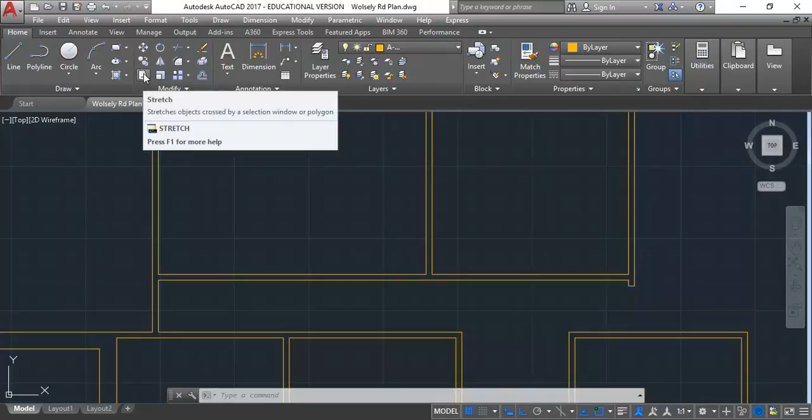To use stretch, if you haven't used this tool before, there's really just one trick to it. Once you click on the stretch tool, you need to remember that a crossing is right to left. With tools like this, if you haven't used them before, look at the beginning by clicking on the little arrow next to your command line.

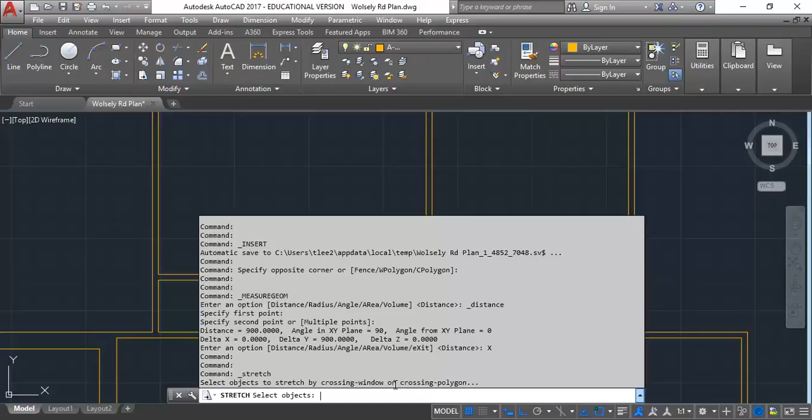It'll bring up all the text that's come up previously, and there you can see it says: after stretch, select objects to stretch by crossing window or crossing polygon. So the key term there is crossing, and if you remember, you get a crossing window by clicking right to left.

A crossing is green, and you can see there by going from the right-hand side and now moving to the left, I get a green window with a dashed outline. Going left to right, I get a blue window with a solid outline. If that's something you haven't noticed, spend some time making some windows to select things.

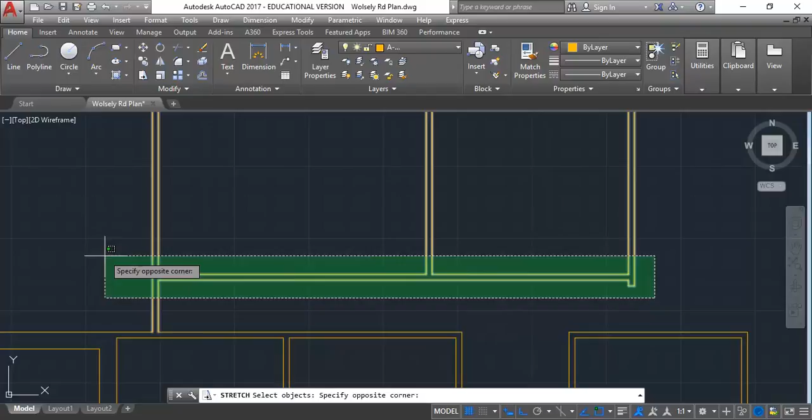By doing a crossing window right to left, it'll cross over all of those wall endpoints that I want to stretch. I'll click and you'll see it's going to highlight those walls, but it's only going to affect the endpoints that were inside my window, inside the green window - so all of the corners here, but not the corners up here.

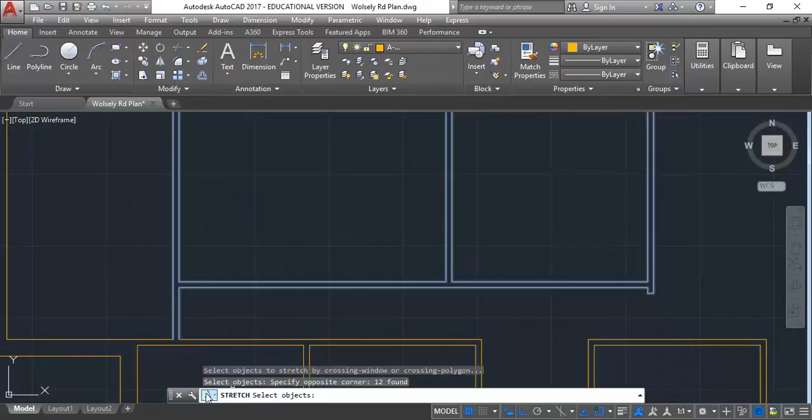Now you can see on the command line it's still asking me to select objects. So what do I need to do? Exactly, enter to move on to the next step, which will then ask me to specify a base point. This can be anywhere - it's just a point to start measuring from. So I'm going to click a point in empty space here, just so it's clear.

Now I want to go straight up from that point. So I'm looking at that point and I'm going to 90 degrees before I type in the measurement.

So when you do this, and you've got like furniture, you've got all things already in there, that will all shrink and stretch. You can stretch those together as well - give it a measurement of how much you want. That's right, so that's what I'm doing now.

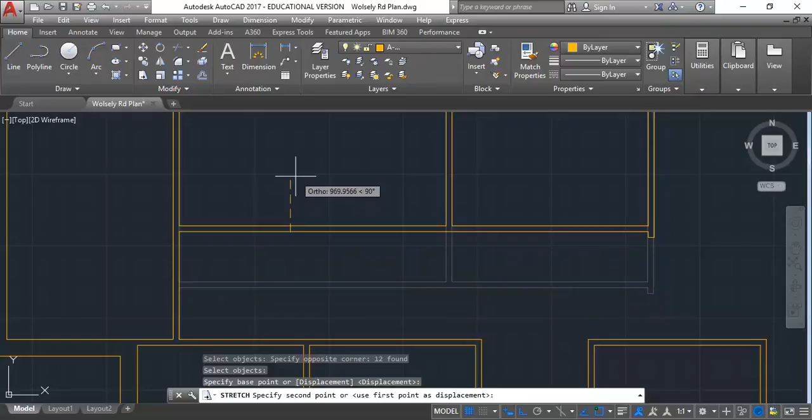So I've clicked the base point, and now by moving in the direction I want, with ortho turned on, it's stretching vertically, so I can type in the measurement, which is 100. If I press enter, it'll take them up in that direction, and I'll check the measurement using measure and make sure that now it's a metre.

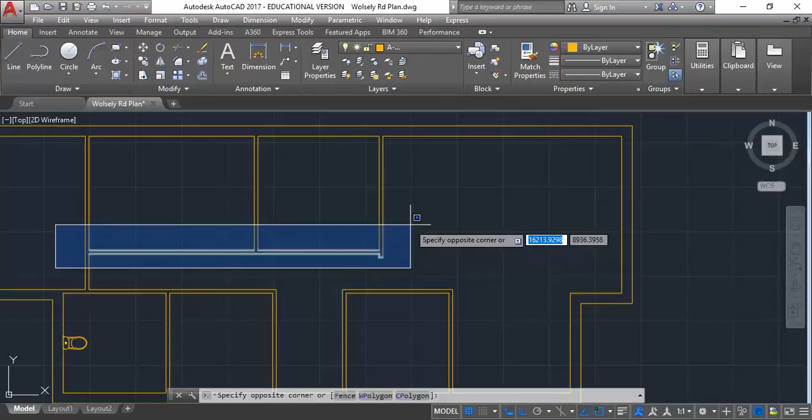So anything that was in that square above - even though it wasn't highlighted with the green square - that furniture, everything will be shrunk too, as long as you go right to left, right to left of the green, so not left to right. If I'd gone this way, you can see it's only selecting the things that are inside, not the ones that are just crossing.

So now that I've done my... yeah, oh no, look, you should just watch because I'm just going to do a little bit more and then I'll give some time to work on it.

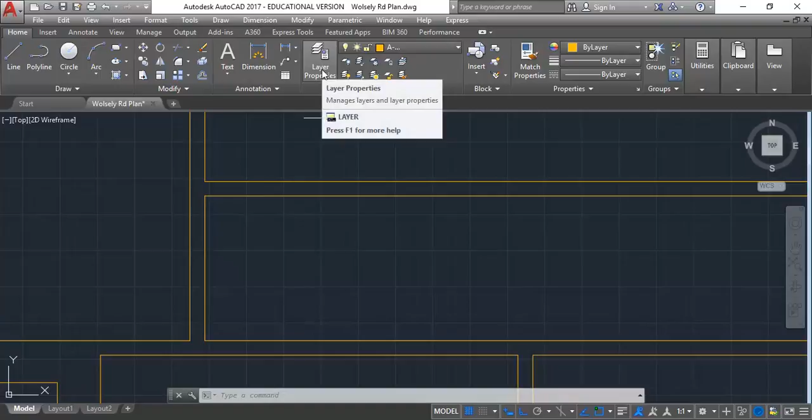So then I want to make the opening. This is the process you should follow normally as well - when you are making a door or any other opening like a window, you should always do the opening first before you try to draw in the detail.

You can see in the layers, I'm on the wall layer, that's all I need. I'm going to draw a line from the midpoint on the right-hand side of that wall, which should be in the centre of the corridor. Then I'm going to go to the left, and with perpendicular on, I'm going to snap to that point on the other side of the wall. Enter to finish, and then I'm going to offset.

I'm going to click offset and make the distance 450. Enter. Then I'll select that line and click above, then select the line again and click below. Enter. Then I can delete the original line, but I'm going to leave that for now because it will be useful later when I make the door.

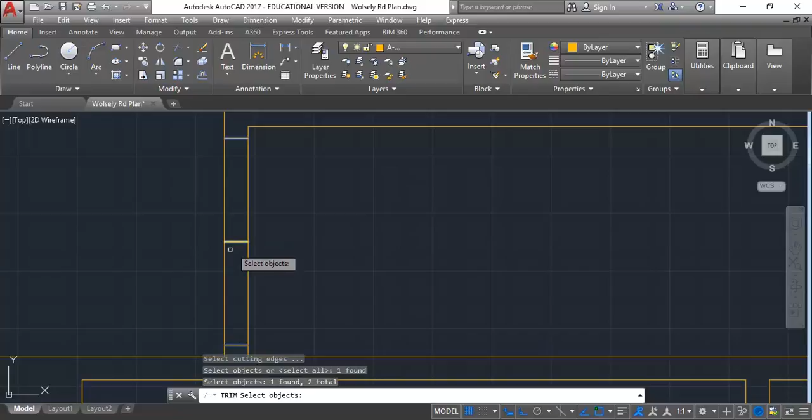So all I'm going to do then is go to trim, and then I'm going to choose the top of the opening and the bottom of the opening, leave the middle, press enter, and then I can choose the two parts that I want to take away, enter again, and I've got the opening. You could do that for all of the openings. I might give you a second if you want to try that, and then I'll come back and do the door afterwards.